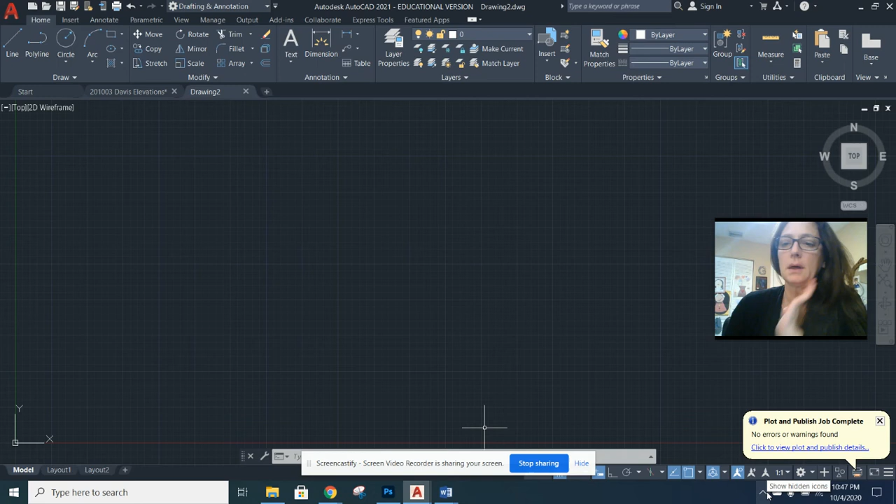Okay, so what I'm going to go over today is lofting and what you need to know about it.

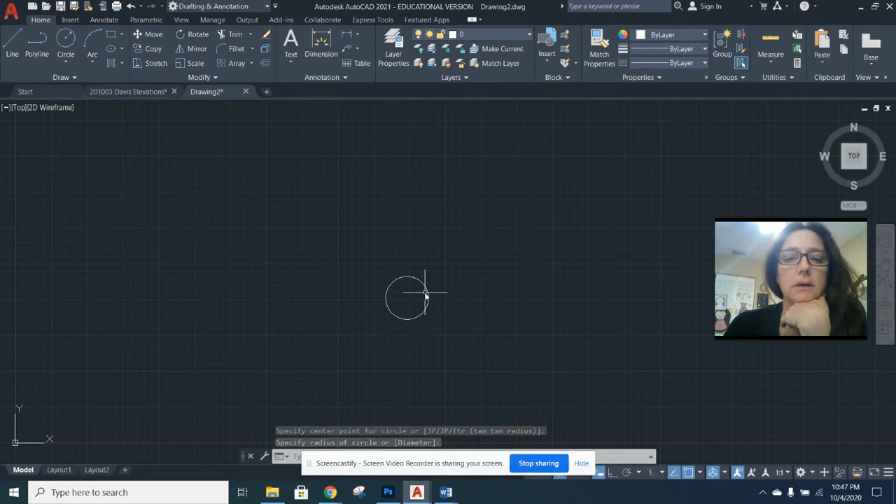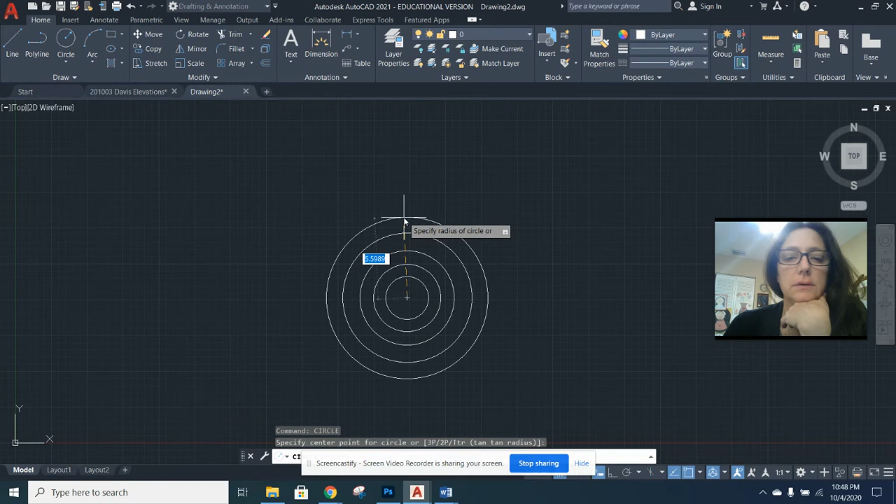So you're going to start off with circles. Basically you're just going to make a bunch of circles, continually of varying diameters. For this project, anything really that you want. And what you need to do is just make at least 6. Actually, I think I want another one that's about this big.

Now, once you have those drawn up, you're going to put it in isometric. And I want you to have your ortho mode on, so it can only go straight up.

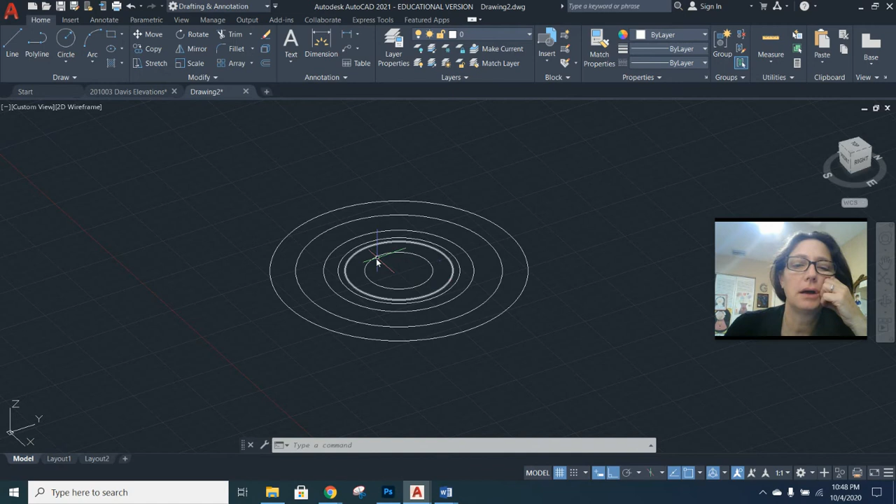And what you're going to do is you're going to decide what's going to be the base of your vase. You need to decide it. I'm going to stick with this one here being my base, and this one's going to be the next one I use. So I'm just going to move it.

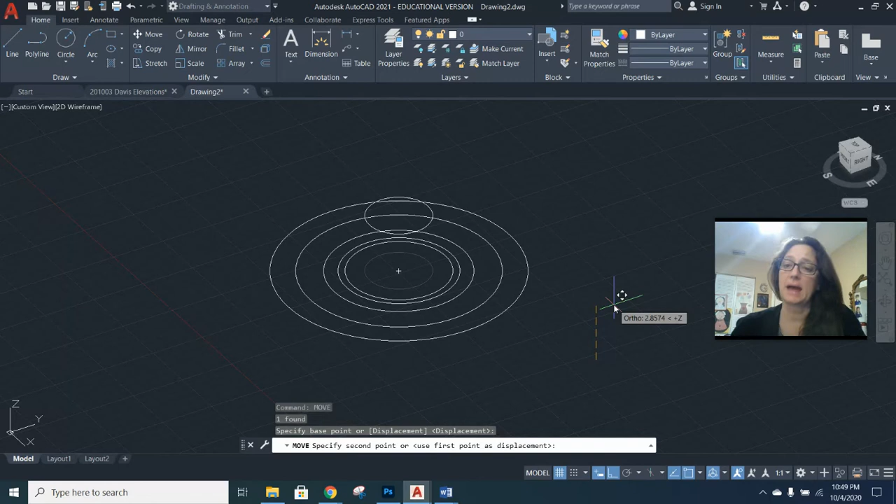And for this, I don't even need to be on the object because I really don't want to be grabbing onto any other snap, because if I do that, then I might run into an issue where the snap overrides the actual movement up, straight up. So I see here that it's ortho.

My rise is about 2.8. I'm pretty happy with that, so I'm just going to put that in. And then this is coming up from here to here.

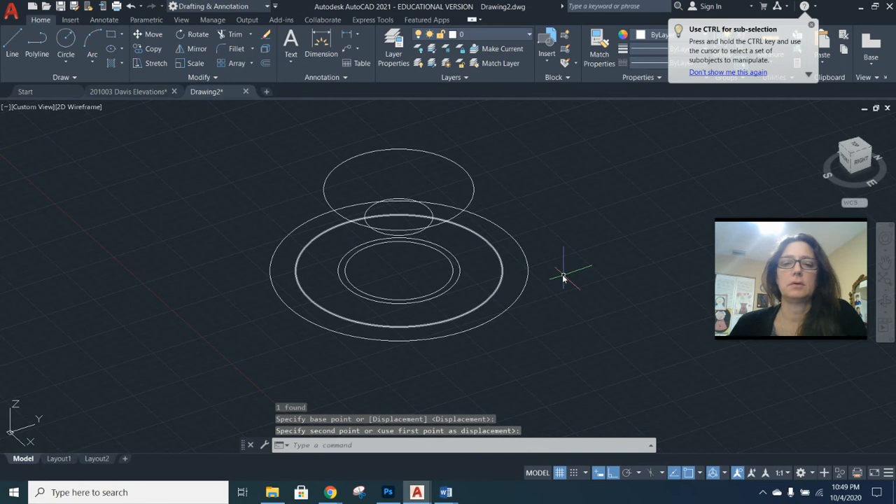Now the next one I want to do is I want to move this one. And then I'm going to move this one. You can kind of see it moving in plane if you want, if that helps you. And then I'm going to move this one all the way up here. And then I'm going to take my little one here and I'm going to move it, probably a little bit higher, maybe something like that.

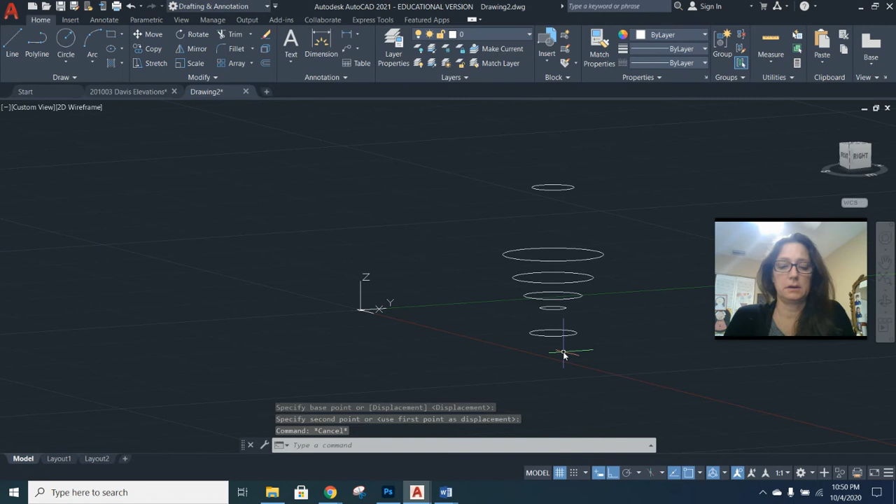Okay, so now I have my 6 circles all in place. So what Loft is going to do is it's going to combine the 2D objects into a 3D solid.

So I'm going to select it, and then I select everything that I want to loft together, and you'll start to get these lines. However, it'll become a single line, and it'll look like you did nothing. And you want to do cross sections. So, yeah, there's your loft, right?

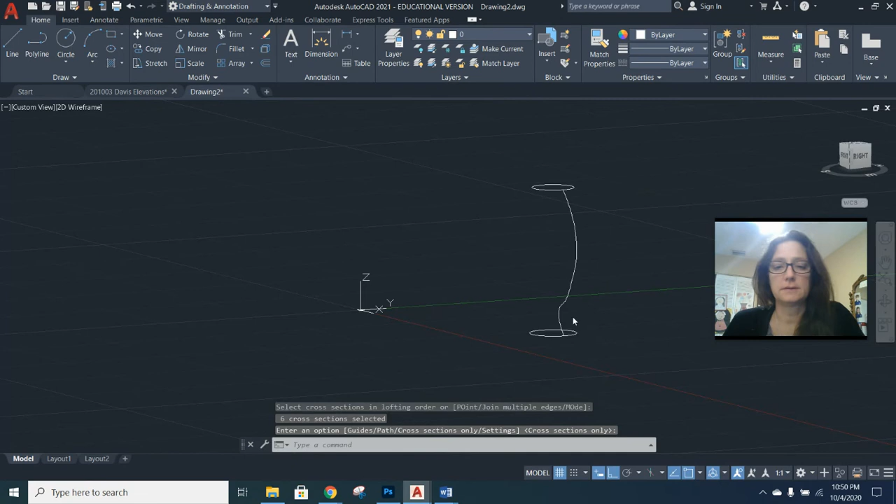Well, if you go into conceptual, you'll see that you actually have this strange looking base, which is pretty hideous, but that's okay, because guess what? I can manipulate the points of my circles if I want to.

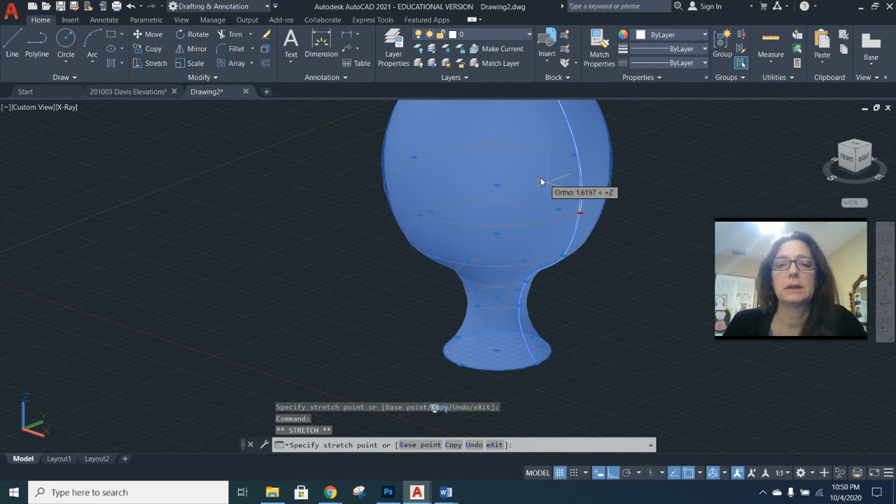And maybe I don't really like the girth of this circle, so I'm going to bring it in a little bit. And then I'm going to bring this one in a little bit, maybe. And then I think I'll still bring in this top one just a little bit. The more you have, the smoother it'll be. I just did 6 to make it easier on you guys.

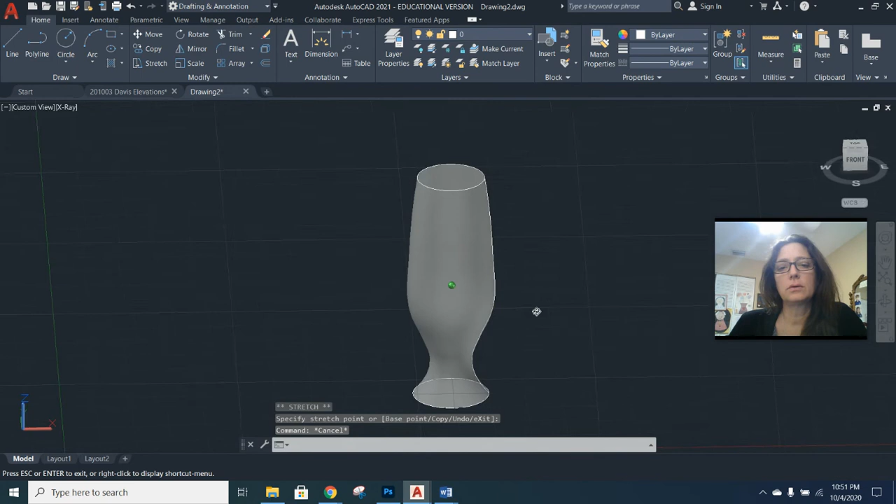Okay, so say this is my base. Now I have a solid object, and that's basically what you're going to do until you get to shelling it. Once we do that, you'll see how you make it hollow.